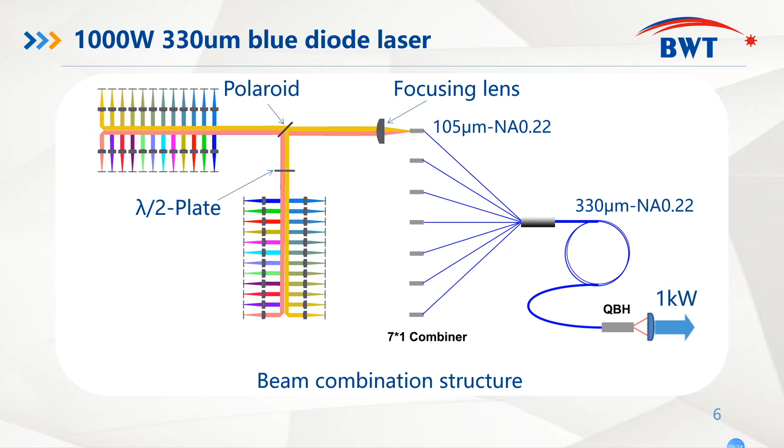Fibers, QBH fibers, and we received 1 kilowatt blue laser output from the connector. To have the good brightness of 1 kilowatt blue diode laser, we must have good brightness of the submodule. So from our special optical design, we restrained 90% power within 0.14 NA to guarantee the good brightness of submodule and also 1 kilowatt blue laser.

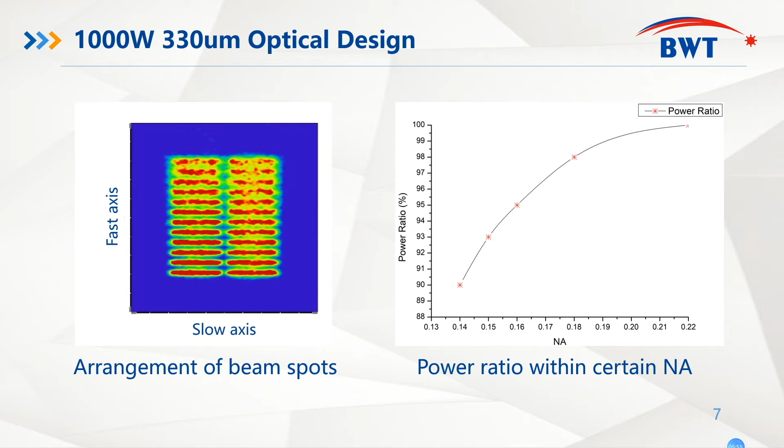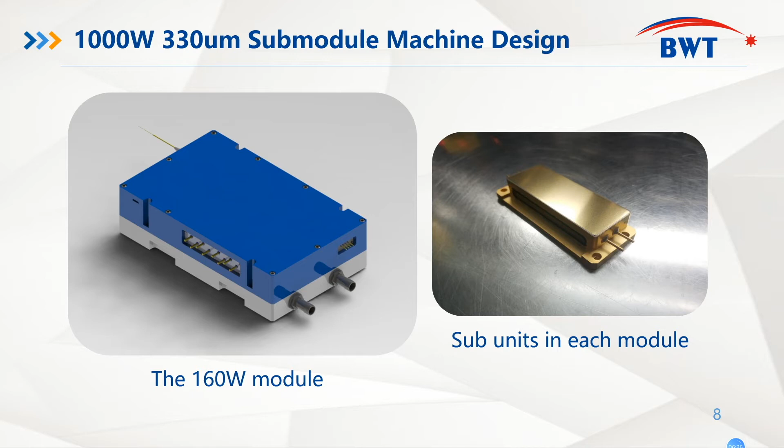And we all know that blue diode laser chips are very sensitive to the environment. So the most important thing and tricky thing is that we develop a special mechanical design which can not only keep the chips away from contamination and maintain the long lifetime, but also have compact size, which is customer oriented.

After the combination of 7 submodules, we finally received 90% combination efficiency and received 1 kilowatt blue laser output power from our system.

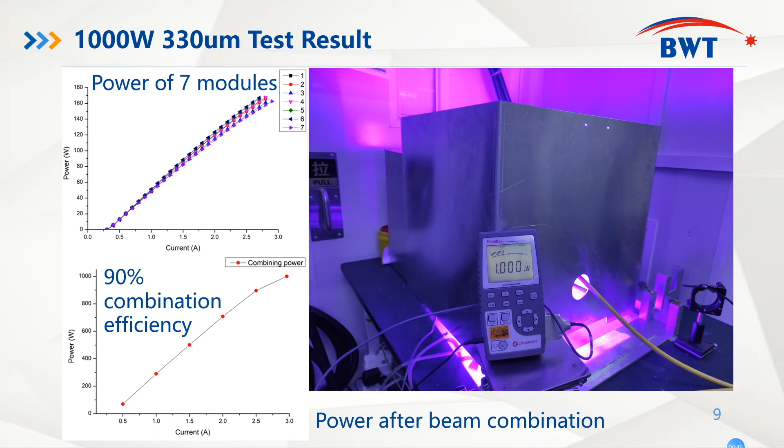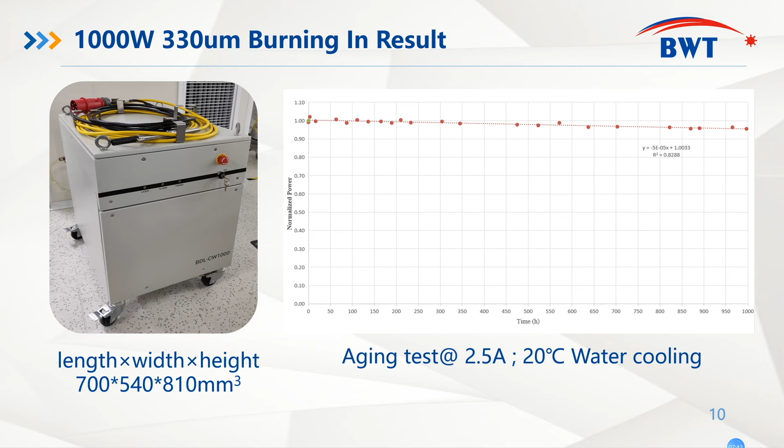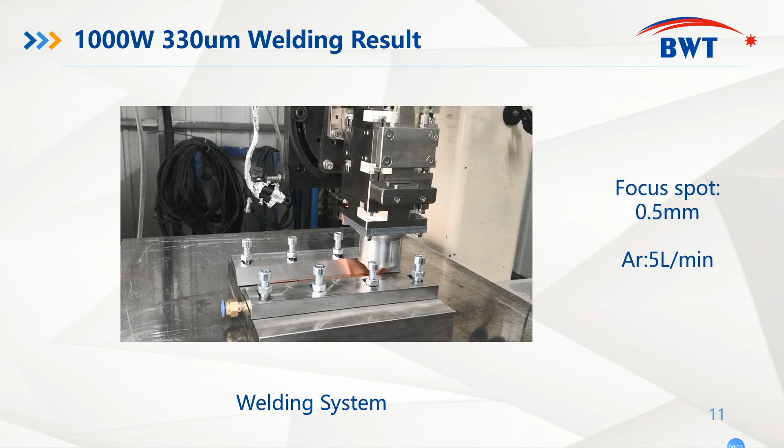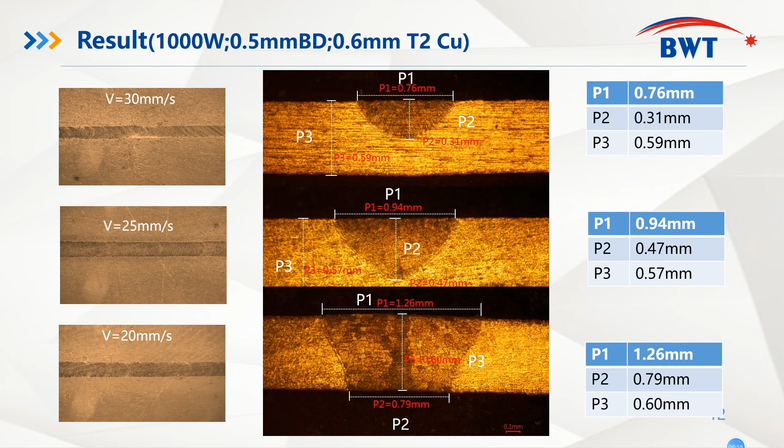And our application department also does some very interesting experiments based on this blue diode laser. From this video, you can see how the welding system looks like and how the application experiment has been done. Here I collect some results of blue diode laser manufacturing with different velocities and different metals, such as copper, aluminum, and stainless steel.